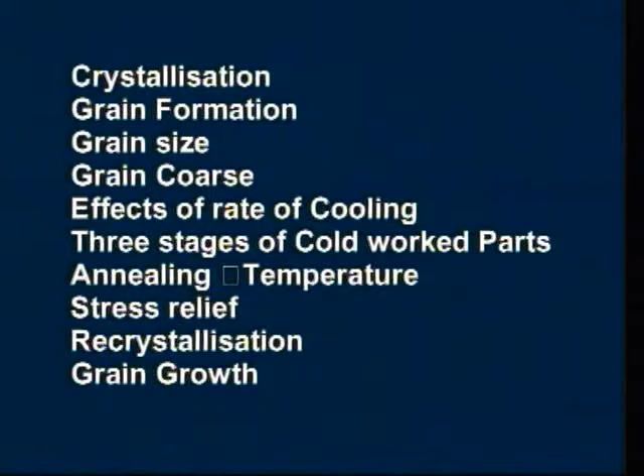Today we are going to discuss crystallization, grain formation, grain size, grain coarse, effects of rate of cooling, and the three stages of cold worked parts under annealing temperature: stress relief, recrystallization and grain growth.

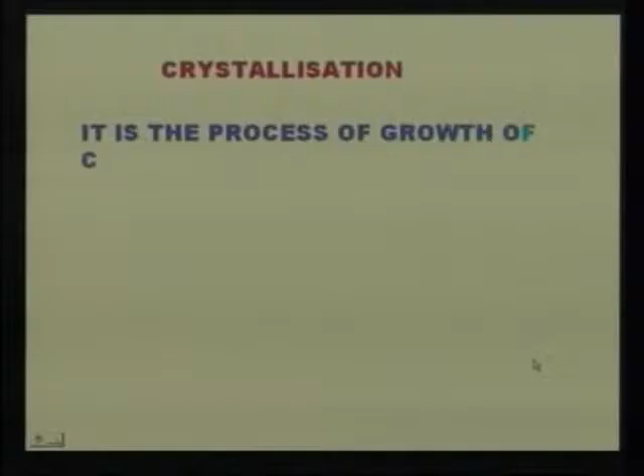Let's discuss crystallization. What is crystallization? It is the process of growth of crystals during conversion of a metal from the liquid state to the solid state. It occurs in two stages: formation of nuclei or crystal centers, and crystal growth from those crystal centers.

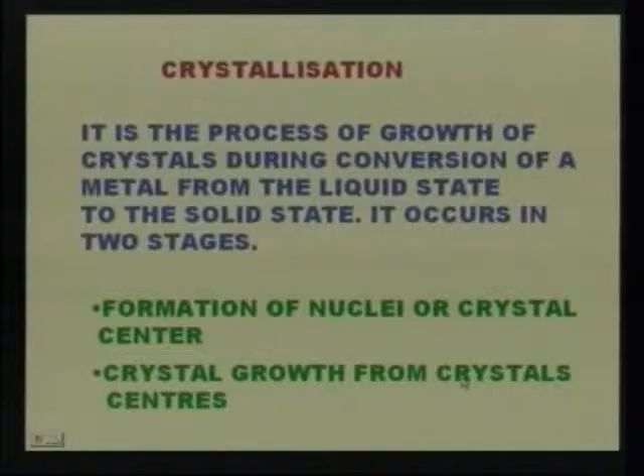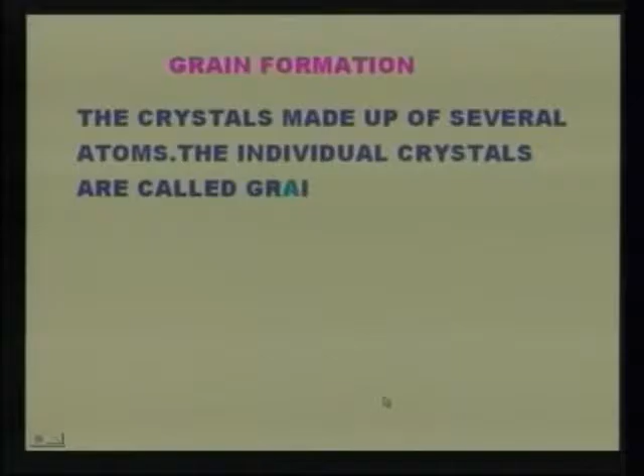Now let's look at grain formation, how the grains are formed in the metallic structure. The crystals are made up of several atoms. The individual crystals are called grains. The visible mass of a solid metal is the combination of grains as the liquid metal solidifies on cooling. The grain formation takes place gradually.

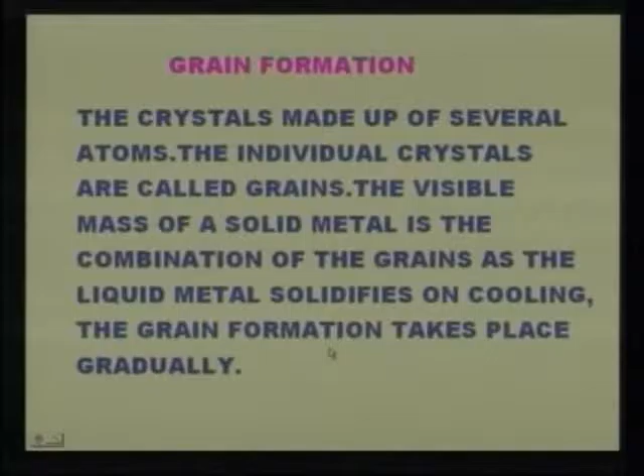When the temperature of the liquid metal drops below its freezing point, stable nuclei appear at various points in the liquid. These nuclei act as centers for further solidification. As cooling continues, more atoms tend to freeze and attach themselves to the already existing nuclei. Each nucleus grows by the attraction of atoms from the liquid into its space lattice.

Crystal growth continues in three dimensions, usually along the axis of the crystal. These nuclei or crystals grow in an orderly manner into different structures like dendritic, lamellar, needle type, or circular, depending on the rate of cooling and presence of impurities in the metal. But in the majority of cases, a branched tree-like structure of crystal is formed, called the dendritic structure, as shown in the figure.

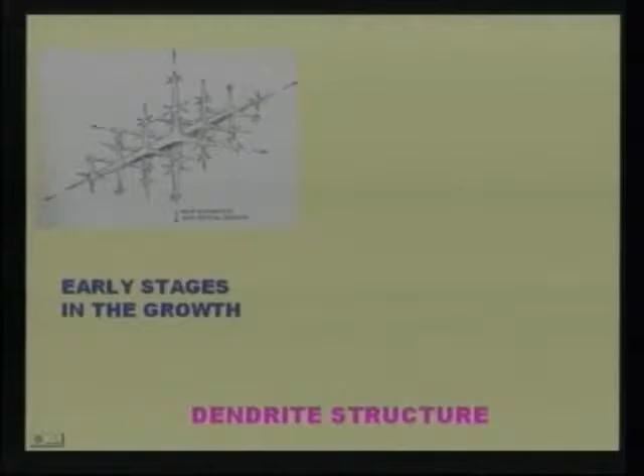Let us see the dendrite structure. Here the figure shows the early stages of growth. When a pure metal solidifies, each crystal begins to grow independently, from a nucleus or center of crystallization. The nucleus is a simple unit in the crystal lattice. The crystal develops with the addition of atoms according to the lattice pattern, rapidly forming a visible dendrite, or tree.

Why is it called dendrite? Dendron is a Greek word. The meaning of dendron is tree. The grain structure is developed like a tree.

Stems, and more stems are formed. These crystals absorb the smaller crystals and form bigger crystals. In this way it develops like a tree. The heat dissipation takes place in all directions, towards the smaller crystals.

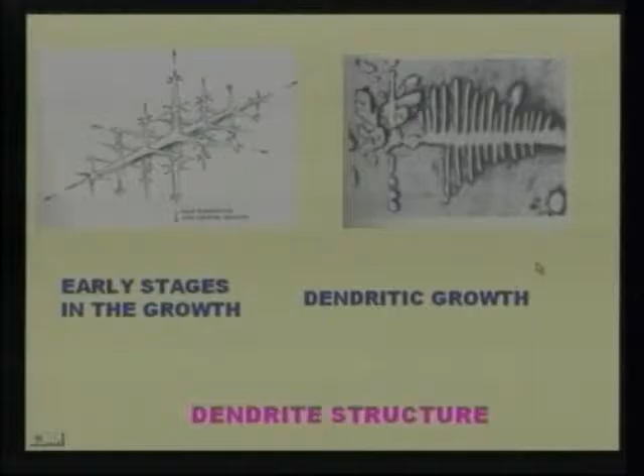Now you can see a real metallic picture of the iron carbon material. This is the backbone of the dendrite growth. First this backbone forms, then it is slowly absorbed by cooling. As cooling continues, these stems slowly absorb the smaller crystals, and the entire liquid metal solidifies, resulting in growth. This type of growth is called dendritic growth.

Now let's see how grain size develops. The size of grains is regular as long as they grow freely in the liquid state of metals. The size of grains is determined by the relation between the rate of growth and the rate of nucleation. If you want to increase the rate of growth, you have to increase the rate of nucleation, which depends upon the temperature variation in the liquid metal.

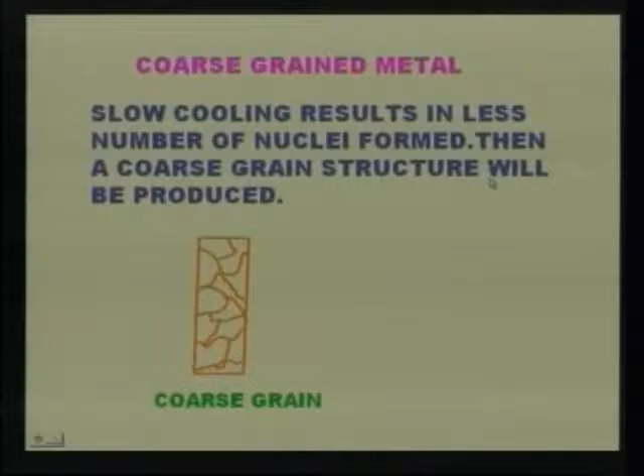Now let us learn about coarse grained material. This coarse grained material develops due to slow cooling. Slow cooling results in fewer nuclei being formed, so a coarse grain structure is produced. Here, the number of nuclei is lesser, so the crystal size is bigger, and therefore the number of crystals is reduced. That's why this structure is called coarse grained metallic structure.

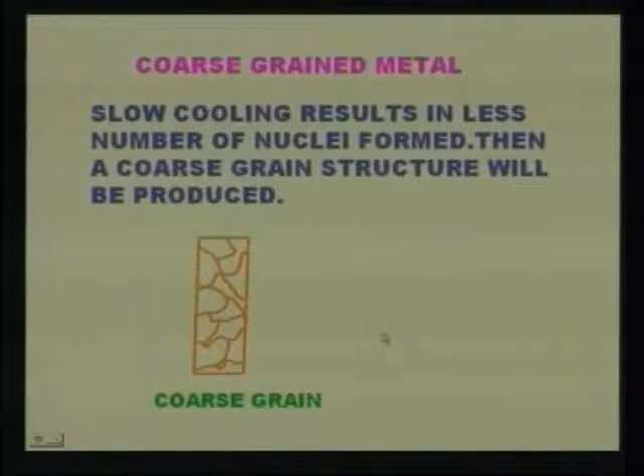Now let us see fine grained material. In fine grained material, the number of nuclei is high. When cooling takes place, more crystals are formed. If the number of nuclei formed is high, a fine grained material will be produced.

Rapid cooling will result in a large number of nuclei formed and a fine grained size will be produced. This material exhibits better toughness or resistance to shock. It also increases yield strength, tensile strength, etc. These mechanical properties are increased. This fine grained material will provide more advantageous mechanical properties, whereas coarse grained material is not as advantageous to use in different applications.

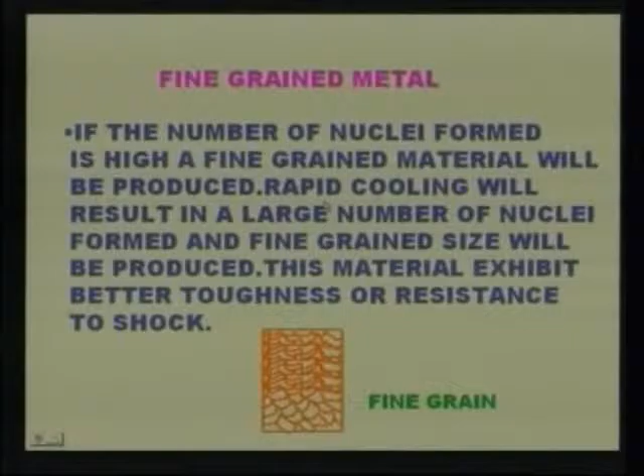Now let us see the other factors that increase the rate of nucleation. One factor is the presence of insoluble impurities like aluminum and titanium. In a pure metal only one metal is present, but if the metal is mixed with another metal, it is called an alloy. So the presence of insoluble impurities, some metals which are insoluble, is another factor that will change and increase the rate of nucleation.

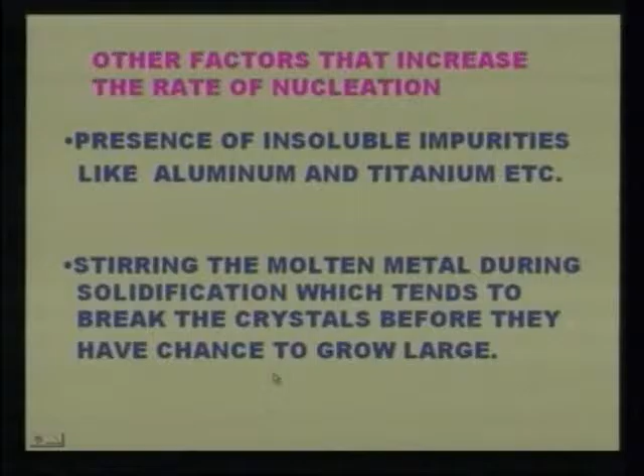Now consider another factor: stirring the molten metal during solidification, which tends to break the crystals before they have a chance to grow large. As we discussed, coarse grain material is disadvantageous. If the grain size is increased, we lose some advantages in mechanical properties. So to avoid that, we create a stirring effect in the molten metal. By providing this stirring, we can reduce the size of the crystal and promote the fine grain material, which is more advantageous than the coarse grain material.

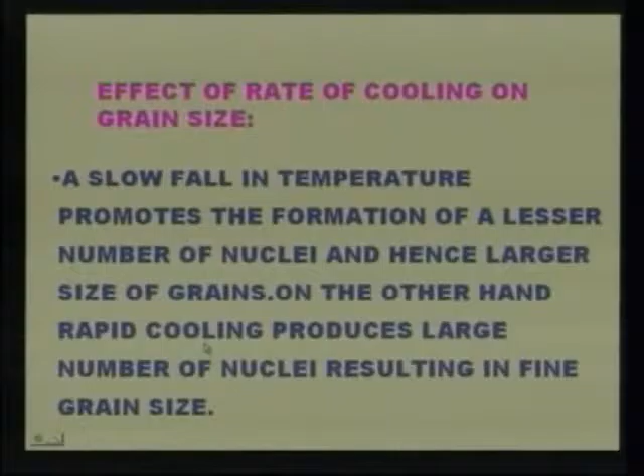Now let us see the effect of rate of cooling on grain size. A slow fall in temperature promotes the formation of a lesser number of nuclei and hence a larger size of grains. On the other hand, rapid cooling produces a larger number of nuclei resulting in fine grain size. Slow cooling helps form a lesser number of nuclei, therefore the size of the crystal increases, whereas rapid cooling restricts the growing of the grain size, creating more crystals of smaller sizes, which provides fine grain size.

Now let us see another effect: grain size on mechanical properties. Let us discuss fine grained material. In fine grained material, it exhibits better toughness or resistance to shock. This is an advantage. These are harder and stronger than coarse grained material. It has greater yield strength, better surface finish, and fatigue strength.

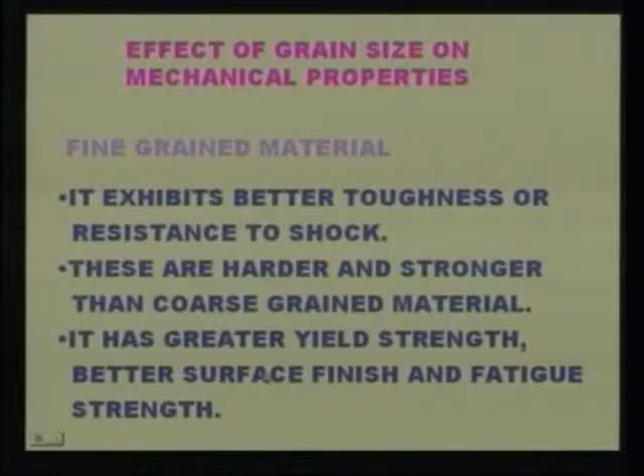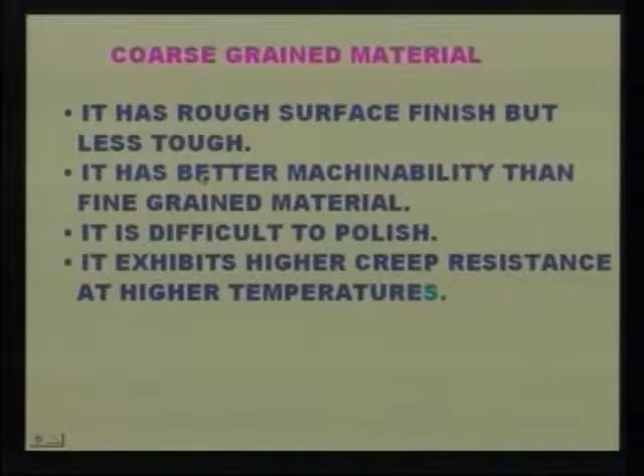Now let us see coarse grained material. It has a rough surface finish but is less tough. It has better machinability than fine grained material. It is difficult to polish. It exhibits higher creep resistance at higher temperatures. It may have cracks during quenching. These metals have good heat and electrical conductivity.

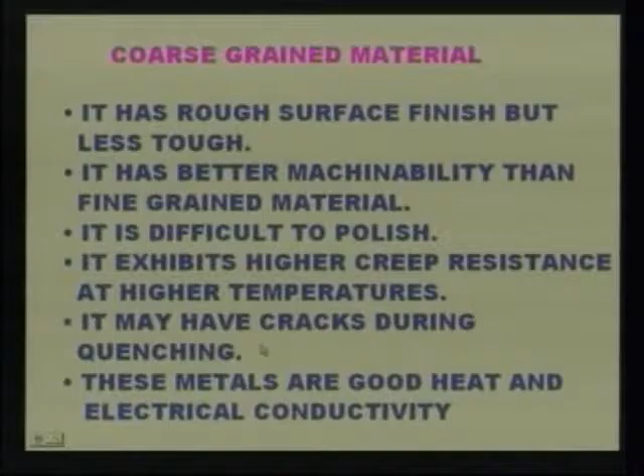Now let us see what are the factors promoting grain size. Increasing the amount of cold working favors nucleation and decreases the grain size. By increasing the nucleation, we can increase the number of crystal formations, therefore promoting fine grain size and decreasing the size of the grain.

Another factor: increasing holding time at any temperature above the recrystallization temperature favors grain growth and increases the final grain size. Another factor: the lower the temperature just above recrystallization, the finer the final grain size. By lowering the temperature just above recrystallization, we can reduce the grain size, so that we can promote finer grain material.

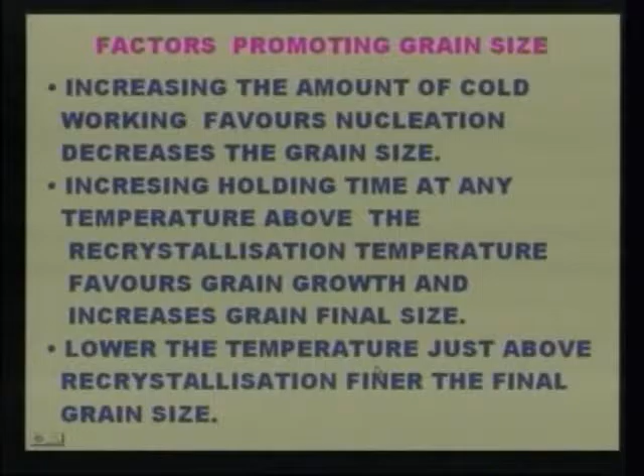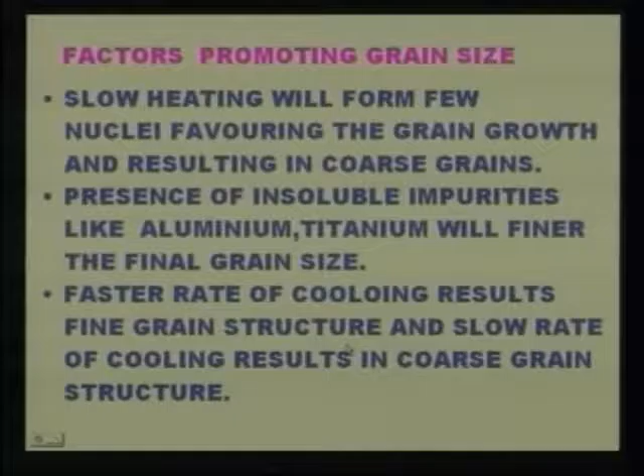Now let us see another point on promoting grain size. Slow heating will form few nuclei, favoring grain growth and resulting in coarse grains. The presence of insoluble impurities like aluminum and titanium will finer the final grain size. A faster rate of cooling results in fine grain structure, and a slow rate of cooling results in coarse grain structure. These are the factors that promote grain size.

Now let us know about the phenomenon of recrystallization. After solidification, there are some local strains and stresses stuck between the crystals, which are disadvantageous in applications. To promote mechanical properties, you have to do the recrystallization process. Whenever a metal is cold worked, there will be an appreciable change in some mechanical properties like yield strength, ultimate strength, hardness, electrical resistance, etc. But properties like ductility and plasticity will reduce.

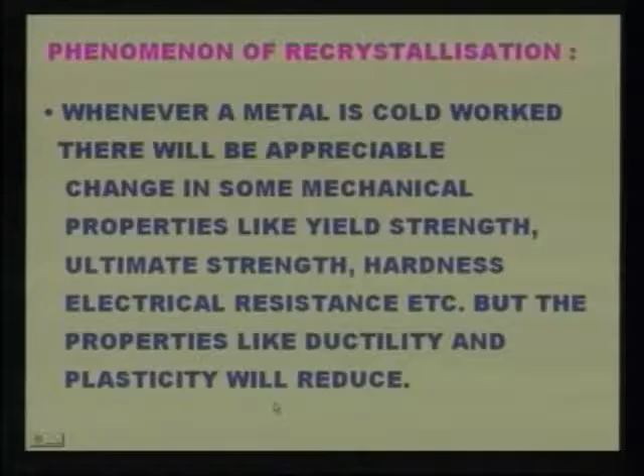Now, some more points on recrystallization: there is considerable stress concentration at cold worked spots. These residual stresses must be relieved before the metal component is put into use. Therefore, cold worked spots are subsequently annealed through 3 stages.

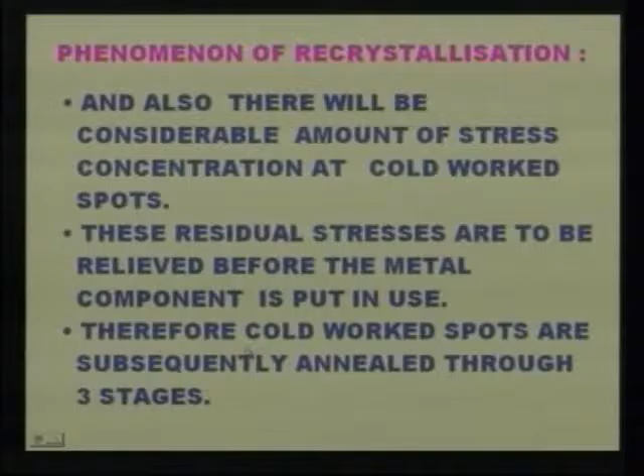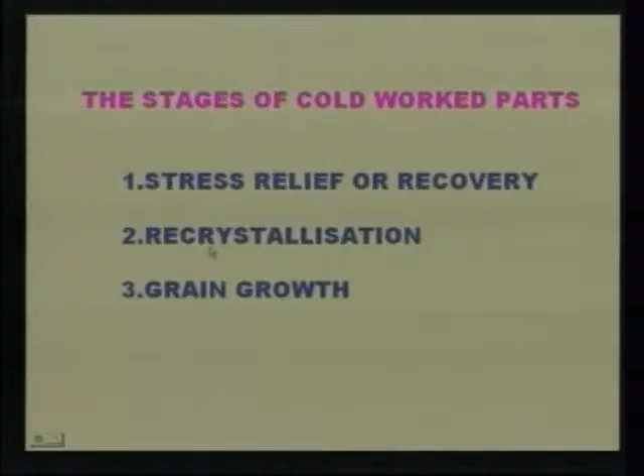Let us see what these stages are. One is stress relief or recovery, the second stage is recrystallization, and the third stage is grain growth.

Now let us see stress relief. It is defined as the process of releasing the internal stresses on a metal at relatively low temperature, which is below its recrystallization temperature. That temperature is about 0.1 multiplied by Tm, where Tm is the melting point.

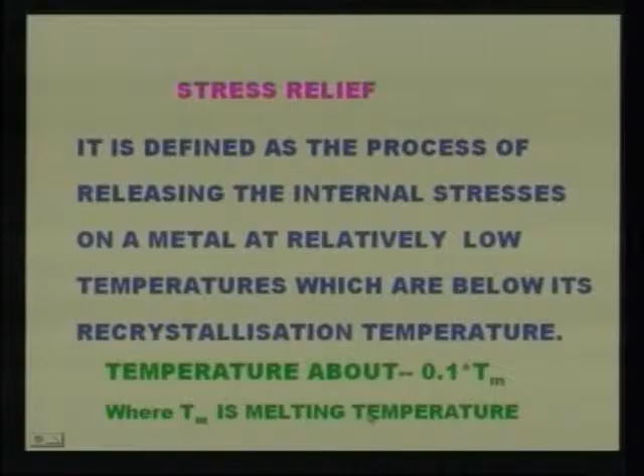Stress relief hardly affects the structure and mechanical properties of the metal. It reduces internal stresses and increases tensile strength. It is an important method for releasing internal stresses in casting, forging and welded equipment, etc. It is often referred to as a stress relieving treatment.

Now let us know about recrystallization. This is the process which occurs with heating in excess of that used for recovery. In this process, new grains are formed, and thus the metal is said to recrystallize. The recrystallization temperature is about 0.3 into Tm for pure metal, whereas it is 0.5 into Tm for an alloy, where Tm is the melting point in Kelvin degrees.

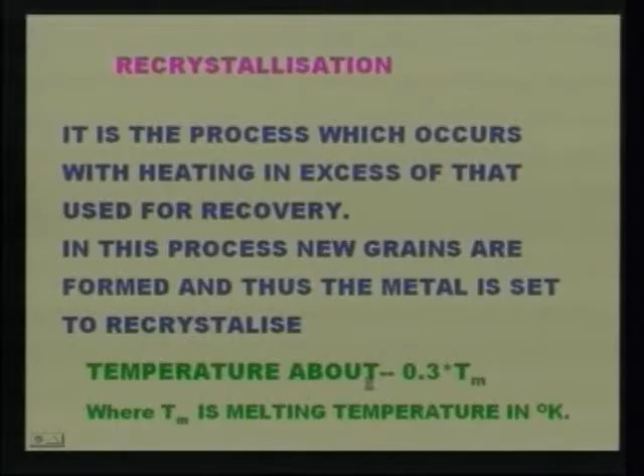Now let us see important points on recrystallization. Due to recrystallization, the tensile strength and yield points are sharply reduced while ductility is increased. It also improves the corrosion resistance. And the greater the amount of cold work, the finer the resulting grain size.

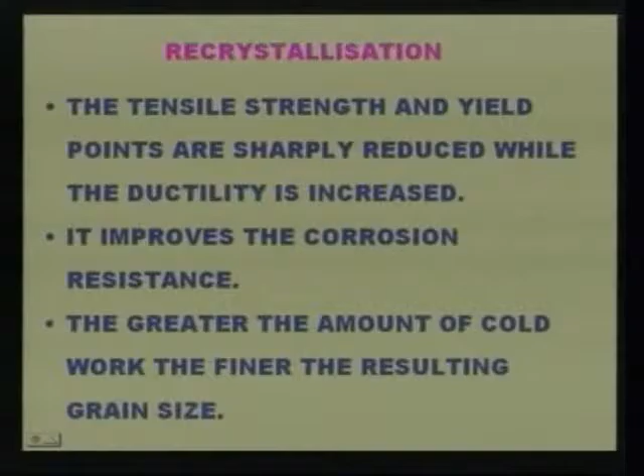This is usually followed by grain growth, during which the larger recrystallized grains grow at the expense of the smaller ones. Soluble impurities raise the recrystallization temperature. For example, pure aluminum recrystallizes below room temperature, whereas commercial aluminum requires heating to about 150 to 200 degrees centigrade.

The recrystallization temperature largely depends on the degree of previous cold deformation and the temperature at which the deformation is carried out. Severe cold work will result in a lower recrystallization temperature. As the temperature of the cold worked metal is raised, the rate of recrystallization increases.

Recrystallization reduces tensile strength and yield strength and increases ductility and corrosion resistance. The greater the amount of cold working, the finer the resulting grain size.

Let us see some of the recrystallization temperatures of solids. Now you see the table for pure metals with their recrystallization temperatures in degrees centigrade. For iron, the recrystallization temperature is 450 degrees centigrade.

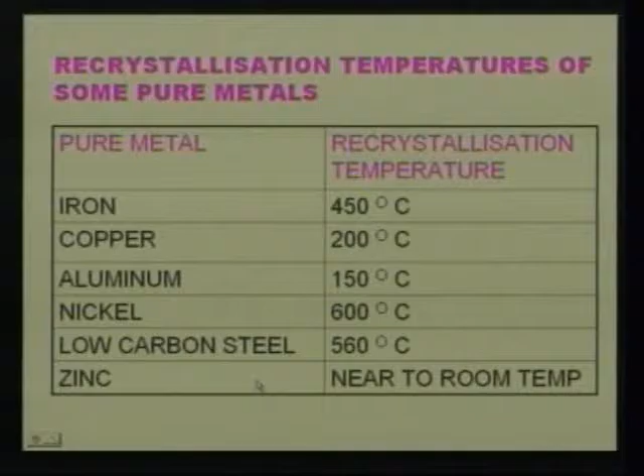For copper, the recrystallization temperature is 200 degrees centigrade. For aluminum, 150 degrees centigrade. For nickel, 600 degrees centigrade. For low carbon steel, 560 degrees centigrade. For zinc, it is nearer to room temperature. Not only zinc, but for lead also it is nearer to room temperature. At room temperature, the structure will be recrystallized, which improves the mechanical properties.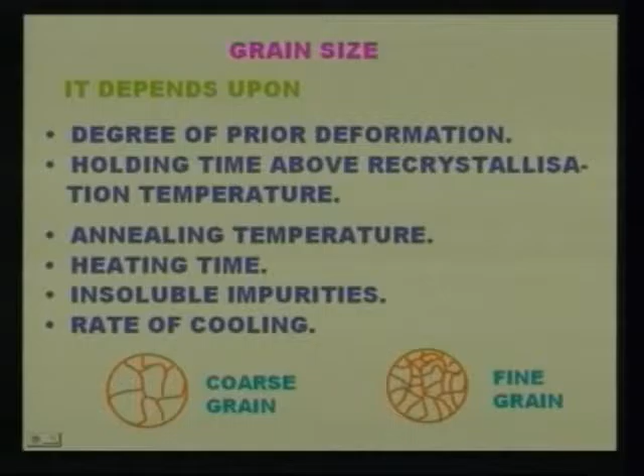You can see the grain sizes here. This is a coarse grain size, as we discussed - the coarse grain crystal size is bigger than the fine grain material crystals. Here you see fine grain crystals, where the crystal size is smaller than the coarse grain crystal size.

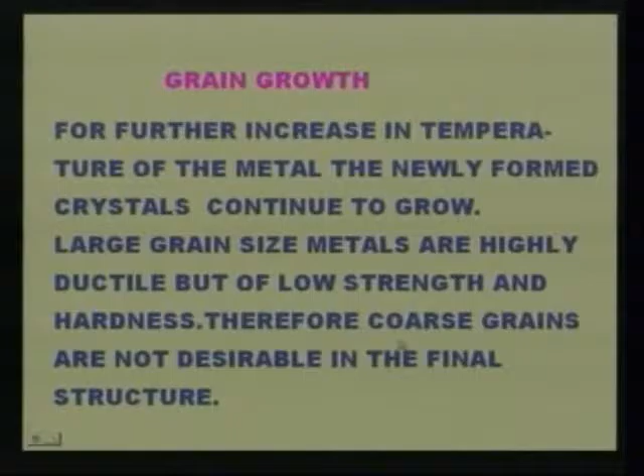Now let us see grain growth. For further increase in temperature of the metal, the newly formed crystals continue to grow. Large grain size metals are highly ductile but of low strength and hardness. Therefore, coarse grains are not desirable in the final structure.

Now let us see cannibalizing of small crystals by larger ones. How does this happen? Assume these are the crystals between the boundaries. You can see this is the curvature of the line between the crystals.

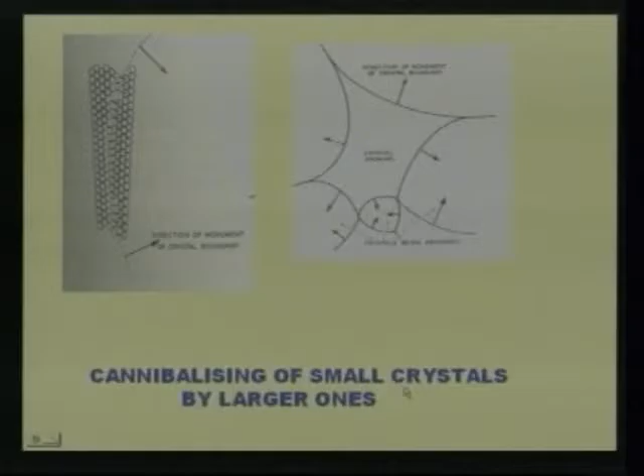A bigger crystal tends to grow in all directions. You can see the direction of movement of the crystal boundary. When it is growing in all directions, at the boundaries if there are any small crystals, those will be absorbed by the bigger crystal, and in that way the crystal size increases. This is the process of cannibalizing small crystals by larger ones.

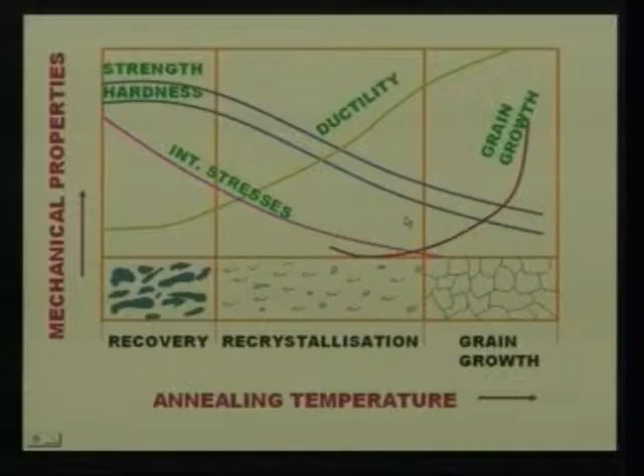In this session we have discussed the crystal, that is an orderly array of atoms in space, and space lattice, which is a 3-dimensional network of imaginary lines connecting the atoms in a repetitive crystal structure in space, and also the unit cell, which is the smallest unit having the full symmetry of a crystal.

Types of space lattices: most engineering metals crystallize either in cubic or hexagonal systems. We also discussed crystallization, grain formation, grain size, grain growth, effects of rate of cooling, and the three stages of cold worked parts under annealing temperature, that is stress relief, recrystallization and grain growth.

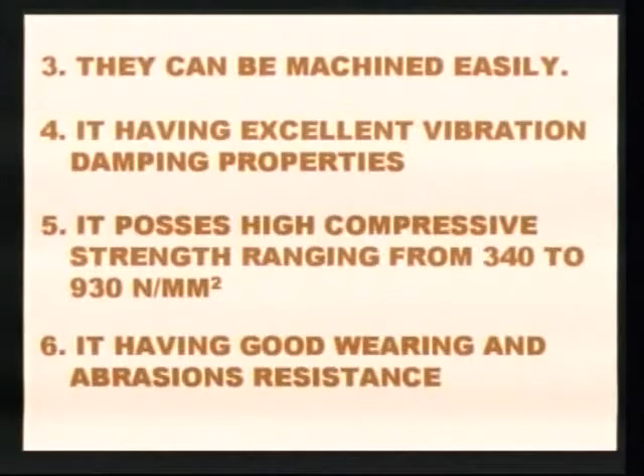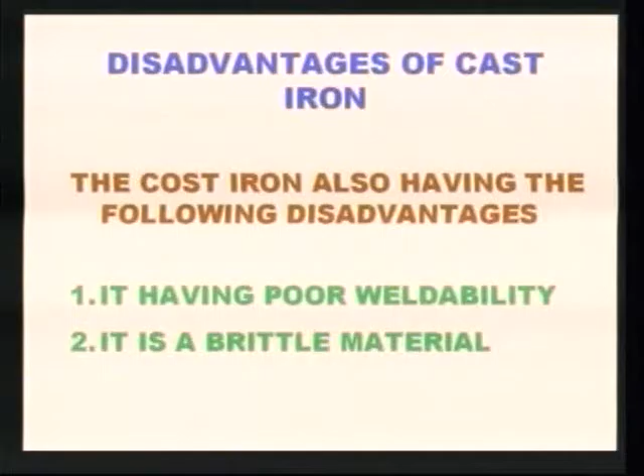Now we will see the disadvantages of cast iron. First, it has poor weldability. Second, it is a brittle material. Third, it cannot be rolled into sheets. Fourth, it has low ductility compared to steel. Fifth, it has very poor corrosion resistance.

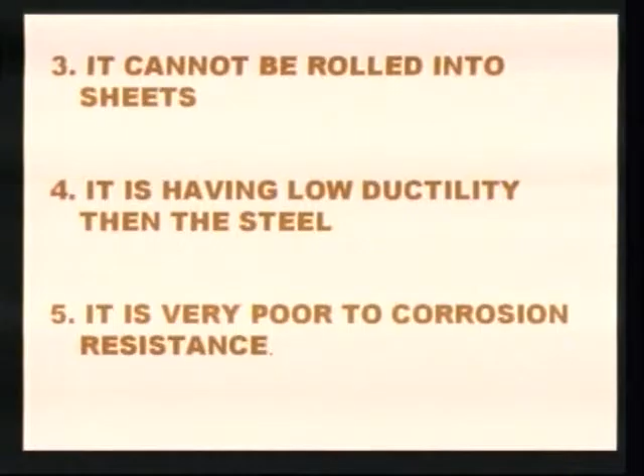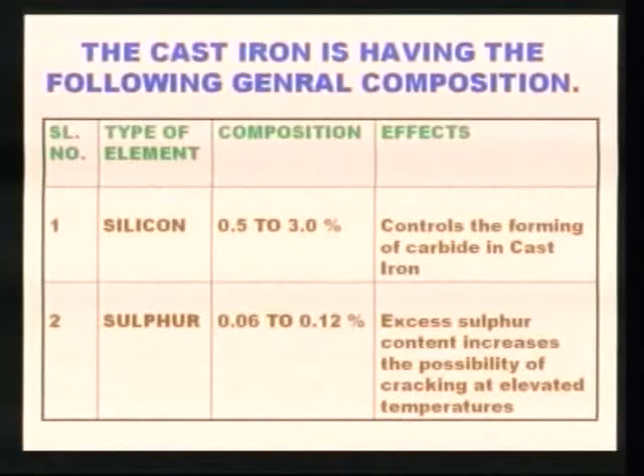The third constituent is phosphorus, from 0.12 to 0.3%. It reduces toughness and makes the cast iron brittle.

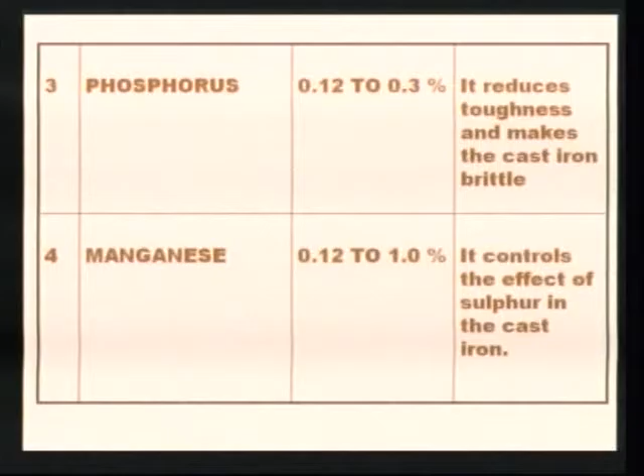The fourth constituent is manganese, generally from 0.12 to 1.0%. It controls the effect of sulfur in cast iron.